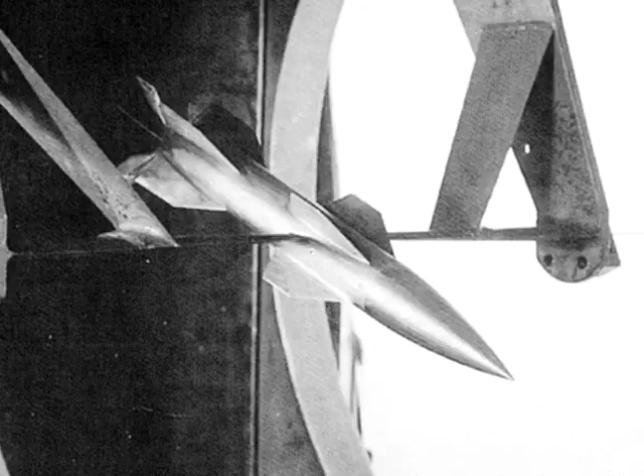On November 28, 1938, legendary aviator Charles Lindbergh sat down to write a letter to his colleague Joseph Ames. Lindbergh had been visiting Germany regularly for several years during a period of aeronautical achievements such as the Hindenburg airship, the first supersonic wind tunnel, and the construction of the first turbojet engine. He had become increasingly concerned that German military aircraft were flying higher and faster than their U.S. military counterparts. One reason was the coordination of their national research efforts.

Lindbergh wrote, "It is more necessary than ever before to give full scope to research if we are to regain the leadership we have lost in some of the fields of military aviation." Written just weeks after the terrifying Kristallnacht attacks in Germany shook the U.S. from its complacency, Lindbergh's letters became a key factor in the decision to create a state-of-the-art aircraft engine research laboratory in Cleveland, Ohio.

The National Advisory Committee for Aeronautics, or NACA, was founded by Congress in 1915 to help the U.S. compete with Europe in the area of aeronautical technology during World War I. The NACA was a precursor of the National Aeronautics and Space Administration, or NASA, of today. As the threat of World War II loomed, the NACA expanded its research and opened 2 new laboratories. The one dedicated to the study of engines was located in Cleveland, Ohio.

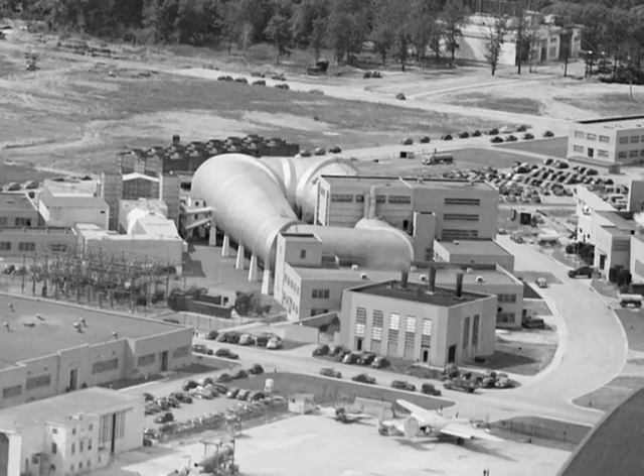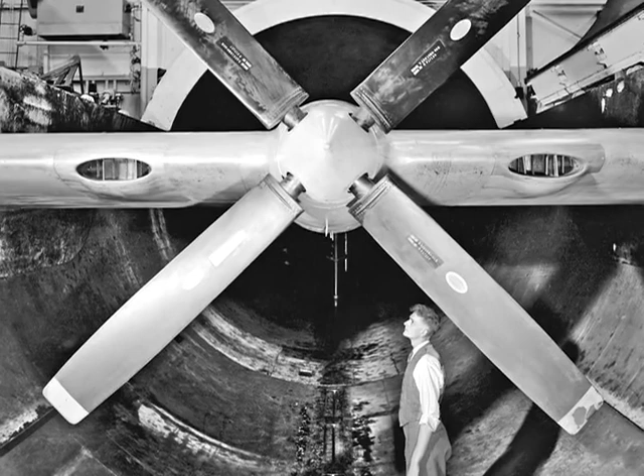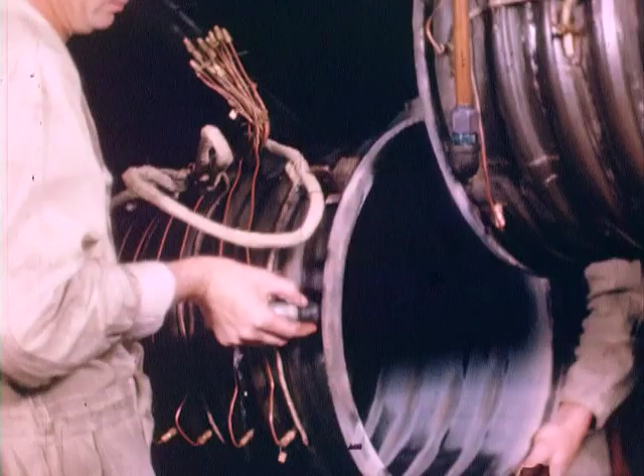This Aircraft Engine Research Laboratory, or AERL, included the nation's first wind tunnel for studying actual aircraft engines in the same conditions they would experience during flight. The Altitude Wind Tunnel, or AWT, allowed researchers to systematically study aircraft engine behavior and perfect new innovations in aeronautics. Designed by some of the best and brightest minds of the day, the AWT proved itself to be a crucial and versatile testing facility, from supporting the development of the jet engine during the 1940s and 50s to its rebirth in the 1960s for Project Mercury and Centaur rocket testing.

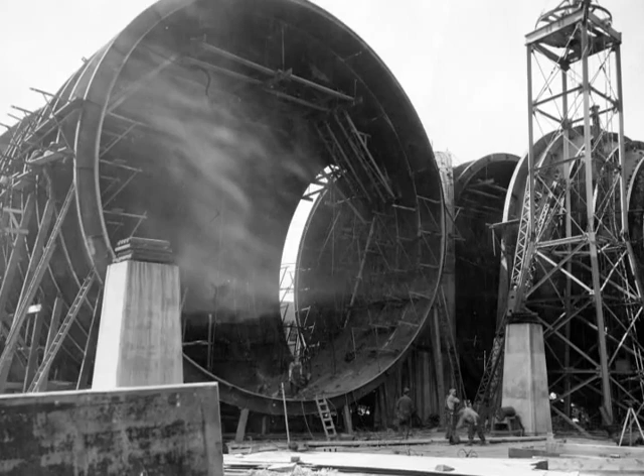The AWT was a huge project. As you can see, it's a massive, massive structure. And there was no technology that would tell you how to build something like this. It was all new. The Altitude Wind Tunnel was likely the most advanced wind tunnel of its time. Designed by engineers at NACA's Langley and Ames laboratories, the AWT included a number of ingenious features needed to test full-scale aircraft engines and the airspeed, altitude, and air quality experienced during flight.

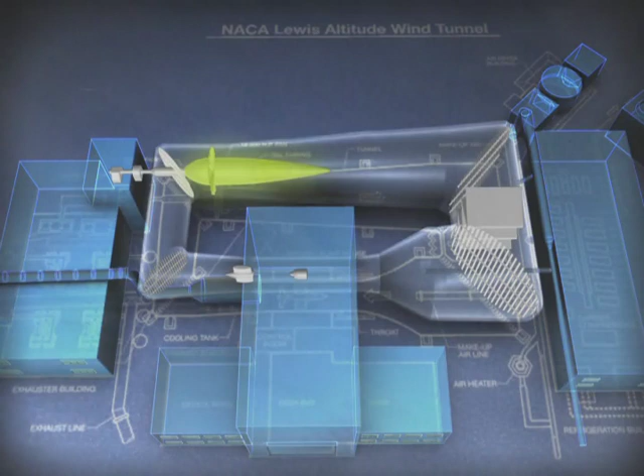This facility had to get temperatures that were very, very cold, and the air had to be almost a vacuum. And this was very difficult to do in a structure this size. And the amazing thing is it all worked perfectly. The wind stream of the AWT was created by a massive 31-foot propeller, resulting in air speeds that could reach 500 miles per hour. As the wind stream raced down the tunnel, turning vanes directed it around the corners and straightened the flow. A powerful refrigeration system reduced the temperature to minus 47 degrees. Large exhausters in the exhauster building removed air from inside the tunnel to simulate the thin atmosphere found at high altitudes.

Just prior to reaching the test section, the diameter of the tunnel decreased in order to further increase the speed of the Arctic wind stream as it rushed into the 20-foot diameter test section. The roaring engine in the test section was operated remotely from the soundproof control room, as myriad instrumentation recorded tunnel conditions and engine performance. Engine contaminants were exhausted from the tunnel through a large air scoop located just beyond the test section. Fresh air was introduced into the wind stream prior to the test section to make up for this exhausted air.

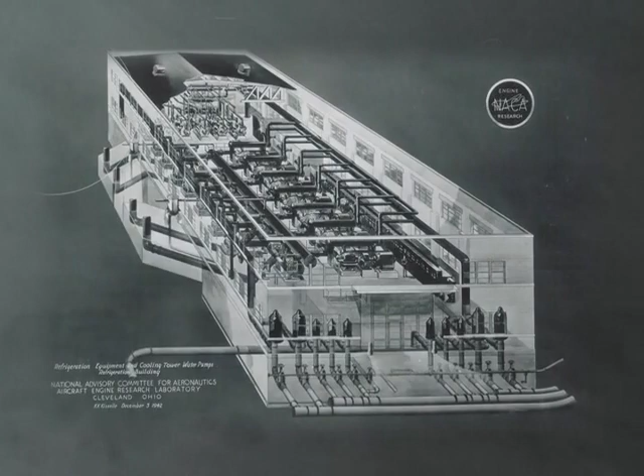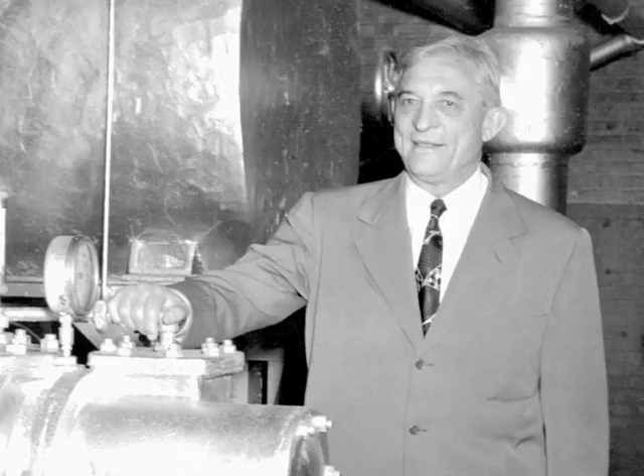One of the most daunting engineering tasks in the design of the AWT was the creation of a system to reduce the air temperature to frigid temperatures encountered in altitude conditions. This powerful system had to cool millions of cubic feet of airflow every minute, an unprecedented requirement that caught the attention of the one man considered to be a world expert on the cooling of air, Willis Carrier. Willis Carrier had pioneered the field of air conditioning and felt his company's heat transfer experts should be designing the AWT system. He informed the NACA that the Langley boys conducting the tests did not know what it was all about, and that too much money, and of more importance, too much time had been wasted already.

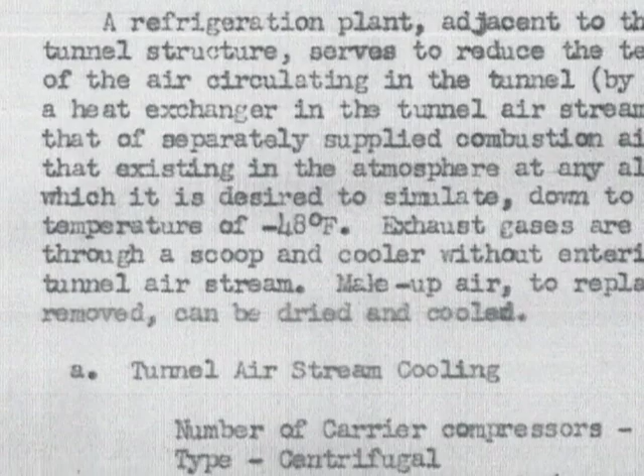Carrier and his engineers went on to devise the AWT cooling system, the largest of its kind in the world. In fact, it was claimed that if the massive cooling system were used for other purposes, it could generate 10,000 tons of ice per day. Willis Carrier would one day refer to the AWT as his greatest achievement.

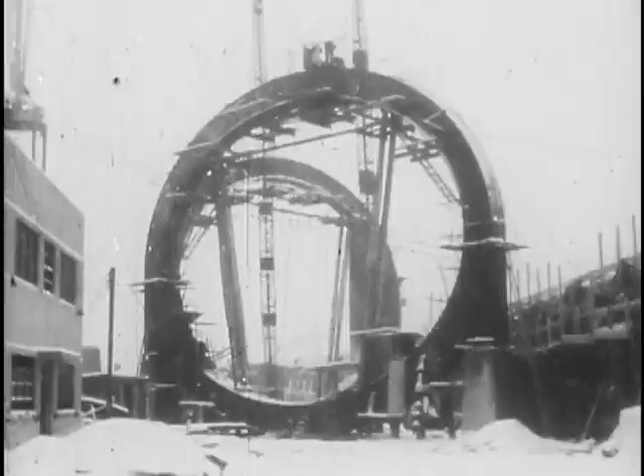Construction of the AWT had begun as the U.S. entered World War II. There was considerable pressure to complete the construction quickly in order to aid the war effort. The new B-29 Superfortress in particular was suffering problems with its engines as it attempted to reach a 30,000-foot cruising altitude. The AWT had been designed to resolve just such an issue.

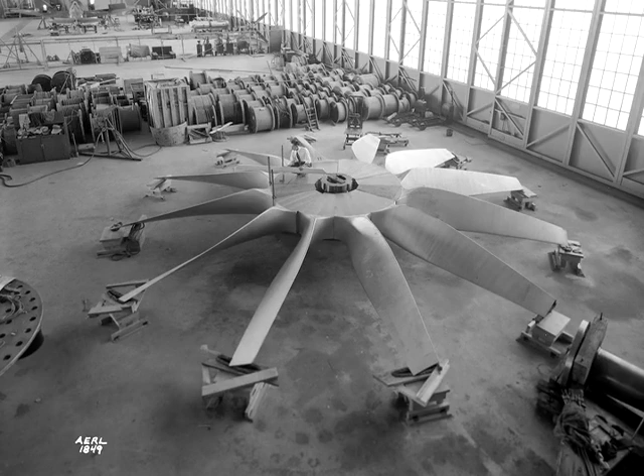On May 17th of 1943, the Memphis Belle became the first heavy bomber in World War II to successfully complete 25 bombing missions. Within 2 months, the Memphis Belle and her crew were back in the U.S. and visiting the AERL as part of a publicity tour. In the hangar behind the bomber, the large fan for the AWT was being assembled. By 1944, construction was completed and the AWT opened its doors for business.

Standing inside a wind tunnel, it is easy to lose one's sense of perspective. Inside, all lines converge toward a single amorphous vanishing point, a virtual light at the end of the tunnel. In order to gain some perspective on the true dimensions of the tunnel, it is helpful to bring a person into view. In much the same way, the research conducted at the AWT and the scope of its changing mission can be best put into perspective by bringing a different individual into frame, Dr. Abe Silverstein.

Dr. Abe Silverstein is best known as one of NASA's founding fathers and is credited with having named the Mercury and Apollo programs. He began his career in 1929 as an NACA researcher at Langley's massive full-scale wind tunnel. In 1943, he was transferred to Cleveland to manage the newly constructed altitude wind tunnel. He immediately set to work, assembling a 90-person team to run the tunnel. Many had been involved in its design and construction. Behind the scenes, Silverstein was involved in something far more secretive.

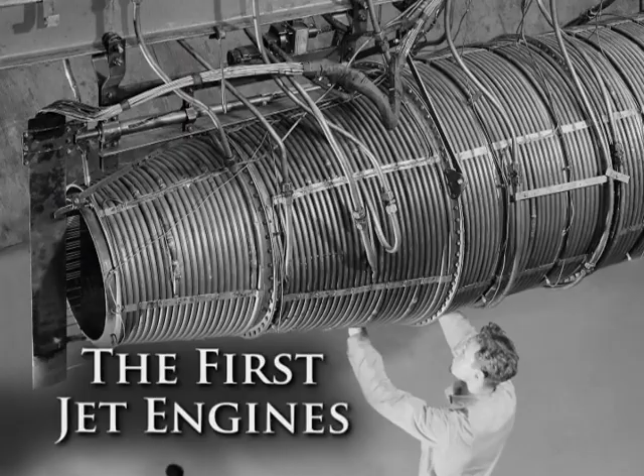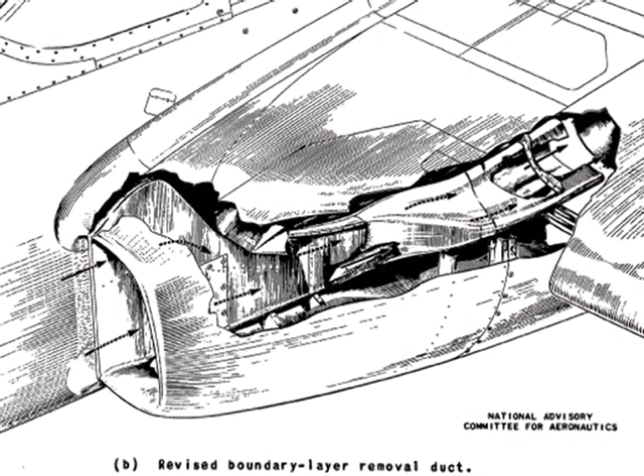The nation's first turbojet engine. The jet engine was developed independently in both Germany and Great Britain during the 1930s. American military leaders had witnessed the first British test flight of the engine in 1941. Plans for the engine were soon secretly transferred to the U.S., where General Electric, or GE, assembled it to create the IA engine, which was almost immediately upgraded and renamed the I-16. The I-16 was incorporated into a Bell YP-59A Airacomet airframe.

In 1943, GE summoned Abe Silverstein to its West Lynn facility to discuss testing the I-16 in altitude conditions. When later asked why he was selected to participate in the secret project, Silverstein replied, "We had the only altitude tunnel. That's the reason I went." Soon afterward, one of the jets was flown to Cleveland for testing in the AWT. Modifications based on the AWT studies allowed better distribution of airflow and reduced drag, improving the aircraft's performance by 25%. However, the Airacomet would not play a role in World War II. The tests would portend an entire new role for the AWT, the development of the turbojet.

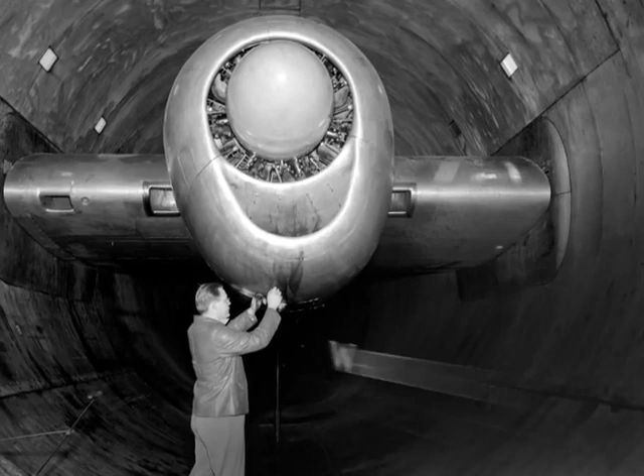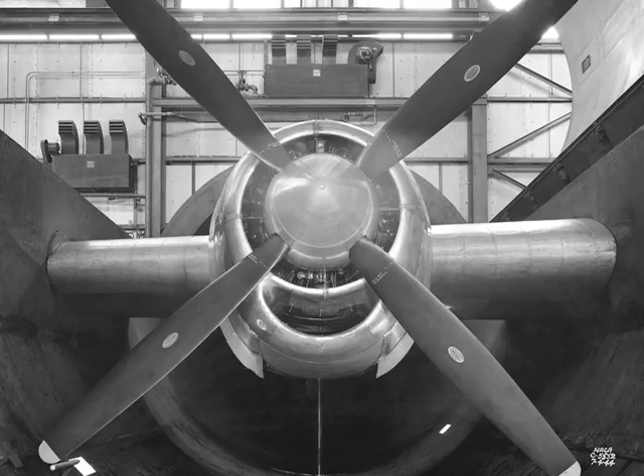In May 1944, an engine from the Boeing B-29 Superfortress was finally installed in the AWT. Researchers determined that its cooling problems stemmed from inconsistent fuel mixtures and poor airflow. By devising the fuel injection system and redirecting the airflow through the engine cylinders, they were able to improve the fuel efficiency by 18%, thus broadening the B-29's flight range and increasing its armament capabilities. The results were too late, however. The B-29's original strategy of high-altitude precision bombing of Japan had been changed to low-altitude firebombing, and the NACA's improvements were not implemented until after the war.

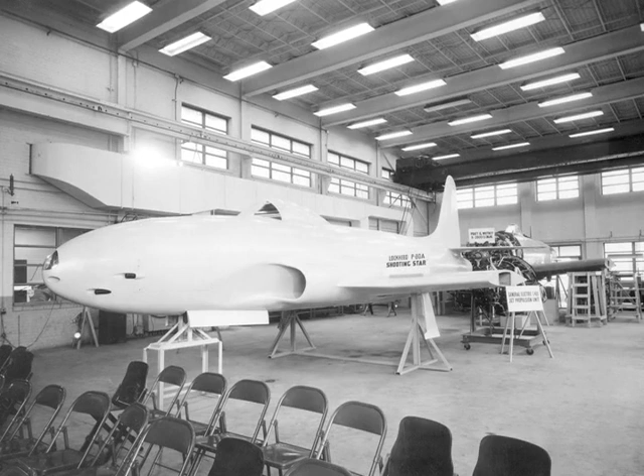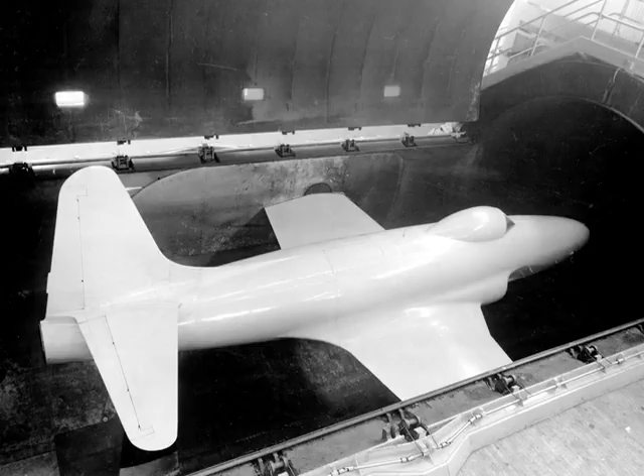The Lockheed YP-80A Shooting Star was the first jet aircraft to be completely manufactured in the U.S., and the first U.S. aircraft to ever fly faster than 500 miles per hour. Studies on the engine at the AWT resulted in the restarting of its GE I-40 engine above 20,000 feet for the first time, and an almost instantaneous 50% increase in thrust through use of a variable area nozzle. The Shooting Star would later go on to a successful reincarnation as the Lockheed F-80 during the Korean War.

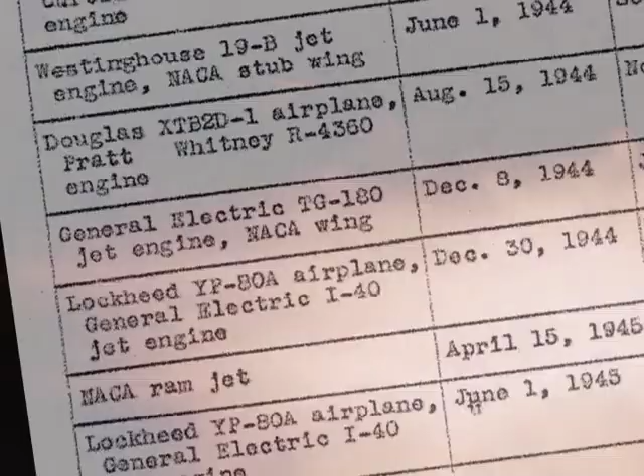In the end, the AWT had little effect on the outcome of the war. Its most applicable contribution, the baffling of the B-29 engines, was not implemented until later. Although U.S. development of the turbojet would not be fast enough to make any significant impact on the outcome of the war, it did have long-term effects. The AWT demonstrated remarkable flexibility and became a significant contributor in developing the nation's first jet engines, both centrifugal and axial flow. The AWT had not only survived the turbojet revolution, it had embraced it.

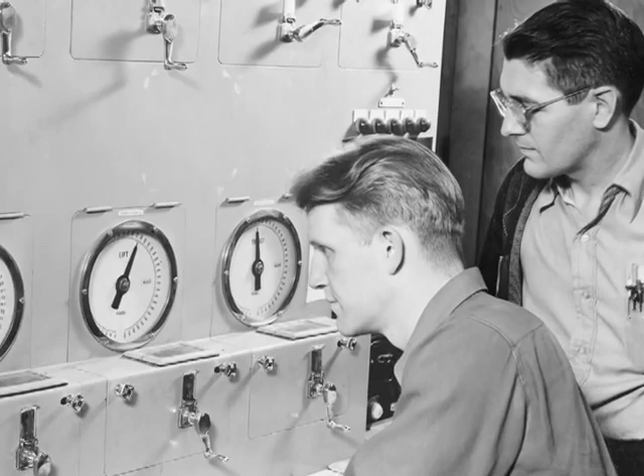During its first 18 months of service, the tunnel was modified to test jet engines. The staff showed that it could handle the new facility. A methodology of analysis was established that would be applied repeatedly over the next decade, and the emerging AERL leadership showed that it could change course with almost no warning.

The end of World War II brought about a reorganization of the entire laboratory. Turbojet research and the new realm of high-speed flight became the top priorities. Abe Silverstein was promoted to Chief of the Wind Tunnels and Flight Division, and in 1949 became Director of Research for the entire laboratory.

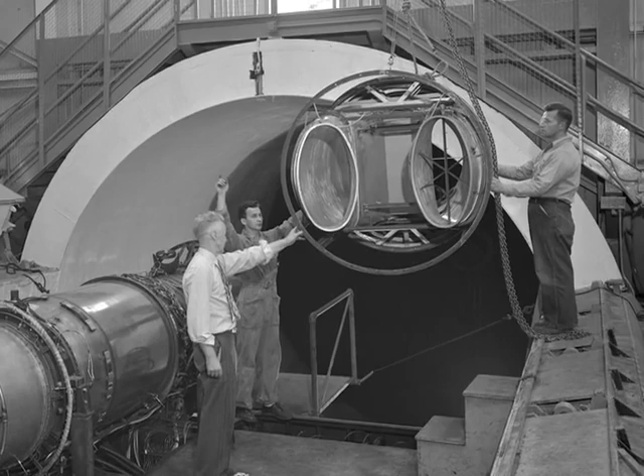One of the most significant problems with the early turbojets was combustion at high altitudes. The AWT was the nation's only facility in which the combustion and performance characteristics of a turbojet could be studied under altitude conditions. Nearly every U.S. jet engine model in the 1940s was tested in the AWT. The engine companies would send their engines here, and they would be just put through their paces. And a great deal of marvelous data was then able to be released to the engine companies.

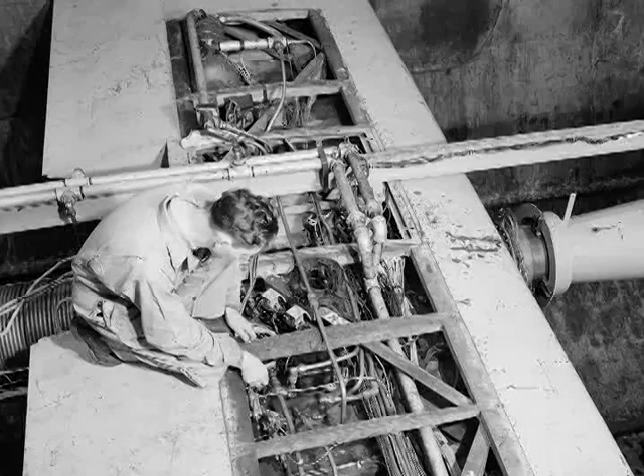Components such as the variable area nozzle and afterburner were run successfully for the first time in the AWT. The afterburner was actually developed at NASA Lewis, and there's a story about Abe Silverstein, who was Director of Research, who peeked in the window and saw the plume of fire coming out of that afterburner, and he was thrilled because it was the first time that it had been tested.

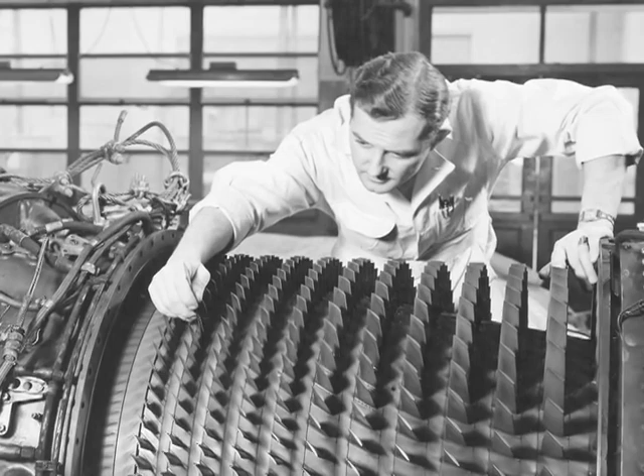As the 1940s drew to a close, the AWT completed its first sprint. The tunnel had been in almost constant operation for 6 years. It had played an important role in the steady development of the jet engine and was used to study ramjets and turboprops. The study and improvement of the axial flow engine from 1945 to 1949 was the AWT's most enduring contribution to the aerospace field.

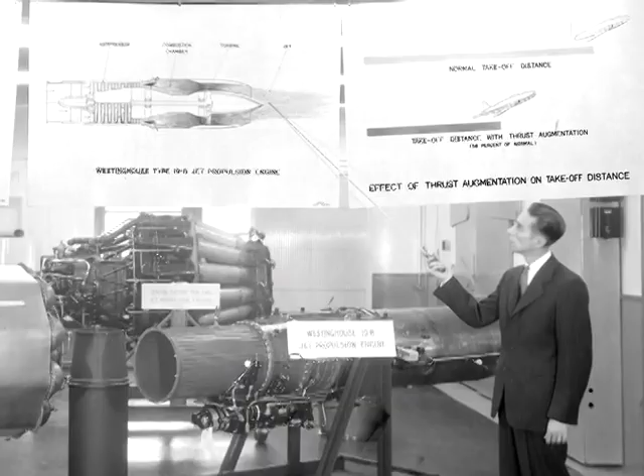The axial flow compressor was really the great contribution that this center made to the development of jet engines. The United States was really a pioneer in the development of the axial compressor. Although they'd been used in Europe, they weren't perfected until Lewis Research Center got their hands on it. The improvements developed in the 1940s would manifest themselves with drastic increases in engine performance and thrust in the early 1950s.

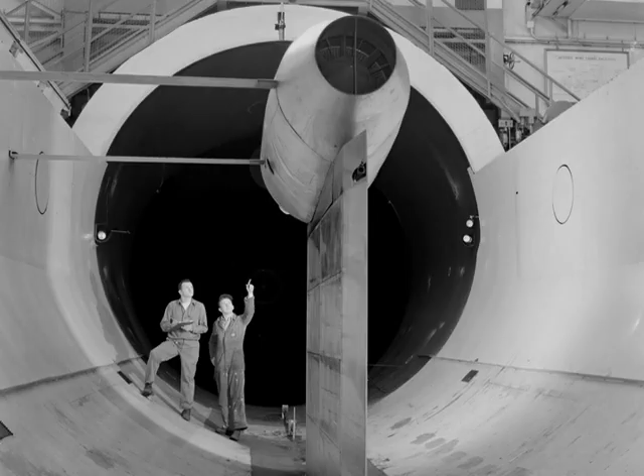In 1952, the AWT underwent an overhaul to increase its testing abilities. A new fan, exhausters, exhaust cooler, and water pump system were added. Afterwards, a series of larger engines were tested in the tunnel. Pratt & Whitney's J57 engine was probably the most successful jet engine of this period. The AWT conducted both general engine studies and a year-long noise suppression investigation on the J57.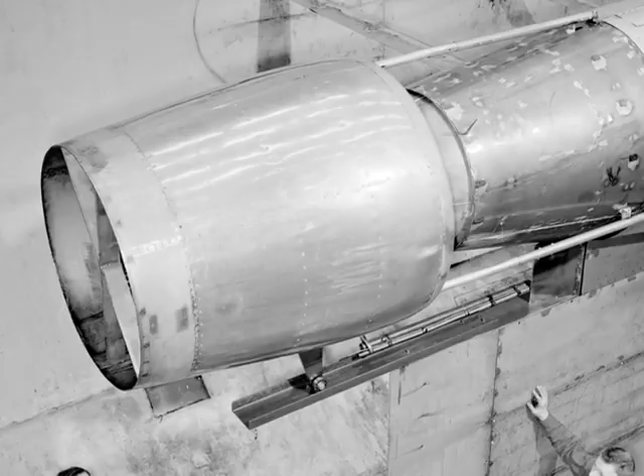By the late 1950s, however, use of the subsonic AWT began declining, and NACA aircraft engine research began plateauing. Some engineers were wondering, where do we go from here? The answer came on October 4th, 1957, with the launch of Sputnik and the laboratory's integration with the new NASA Space Agency 1 year later. Silverstein had been summoned to Washington, D.C. to help create and lead the new agency. The NACA Aircraft Engine Research Facility was renamed NASA Lewis Research Center.

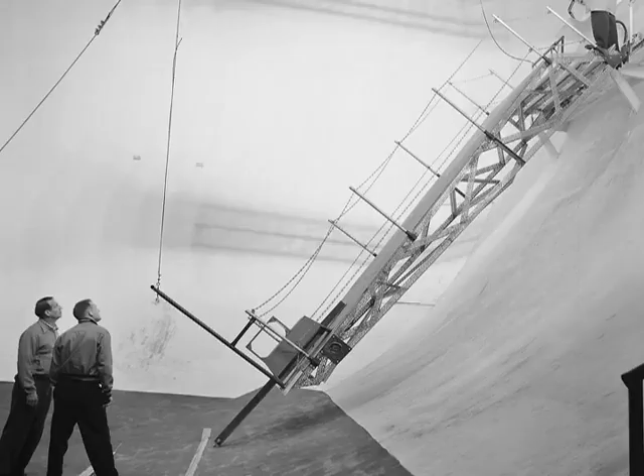The AWT would play a significant role in NASA's first effort, Project Mercury, only not as a wind tunnel. The agency began to recognize that at some point all these aeronautical capabilities had application for advancing the technologies that would be needed to do space travel and space exploration. AWT was one of the prime examples. The refrigeration coils and turning vanes were removed from the western leg of the tunnel so that the Big Joe attitude control and retro rocket system could be tested at simulated altitudes up to 80,000 feet.

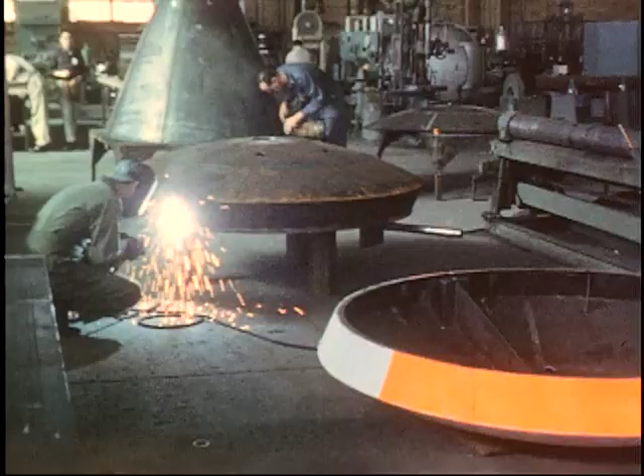Big Joe was a successful single attempt early in Project Mercury to use a full-scale Atlas booster and test the re-entry of a boilerplate Mercury capsule without actually placing it in orbit. Lewis designed the attitude control system and assembled the components. Its guidance system was tested in the AWT.

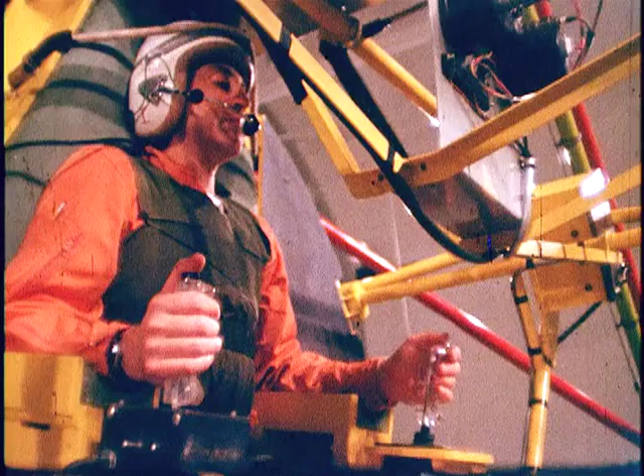Mercury capsule testing in the AWT continued afterwards with the separation system for the Atlas and Redstone boosters, retro rockets calibration, and escape tower rockets. Perhaps the best-known AWT studies, however, were conducted in the gimbal rig. A gimbaling platform had been set up in the AWT for the Big Joe tests. Afterwards, a pilot's chair, control panel, and nitrogen jet control system were added to the rig.

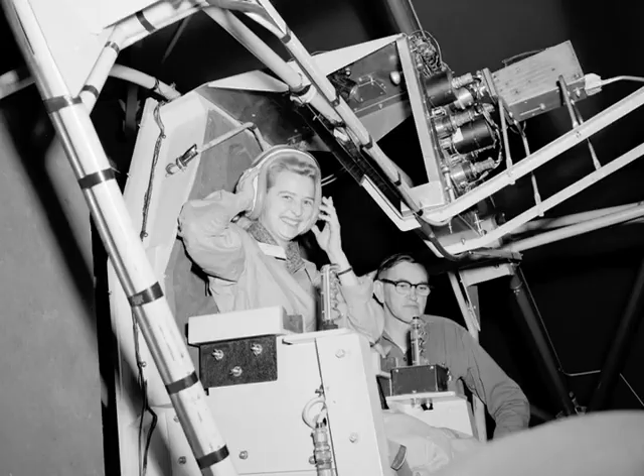The Mercury astronauts would use this multi-axis space test inertia facility, or MASTIF, to practice bringing a tumbling spacecraft under control. A crude dressing room known as the Astro Penthouse was temporarily constructed in the AWT with a cot for astronauts to recuperate on after their rides. In early 1960, the 7 astronauts, a female astronaut trainee, and several pilots traveled to Lewis to train on the MASTIF.

Alan Shepard would be first. On the initial runs, Shepard did well, bringing the machine under control on 1 and 2 axes. Once all 3 axes were in motion, however, Shepard became ill and had to activate the chicken switch that signaled to the engineers to shut down the machine. Over the next few days, however, Shepard continued to climb into the rig until he developed a method to bring the machine to a standstill. John Glenn, Gus Grissom, and the others followed suit.

When the AWT had come online just 15 years before, no one could have foreseen that it would be used as an altitude tank for manned space missions. But once again, it and its staff adapted quickly and contributed to a new role. Out of the test cells, these wonderful mechanics and technicians came and switched their attention from airplane problems to space problems. We found that transition was almost seamless.

The Big Joe capsule verified that the autopilot could keep the heat shield in position during re-entry. The Mercury escape system was never deployed during an actual launch. But the tumbling capsule scenario did manifest itself on Neil Armstrong and Dave Scott's Gemini 8 mission.

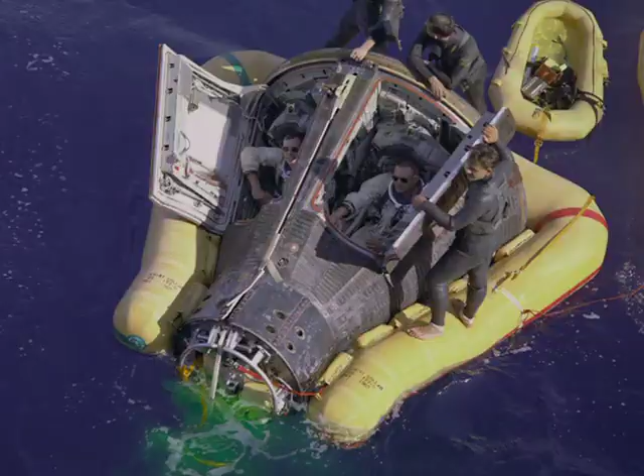Following the decision to attempt to go to the moon, NASA began rapidly expanding its staff and test facilities. The space effort is extremely interesting, and it is an area in which there will be considerable growth for the future. I think the young men in this country who have been properly trained in the sciences and technology are, in many cases, eager to get into the program, and this will afford them the opportunity.

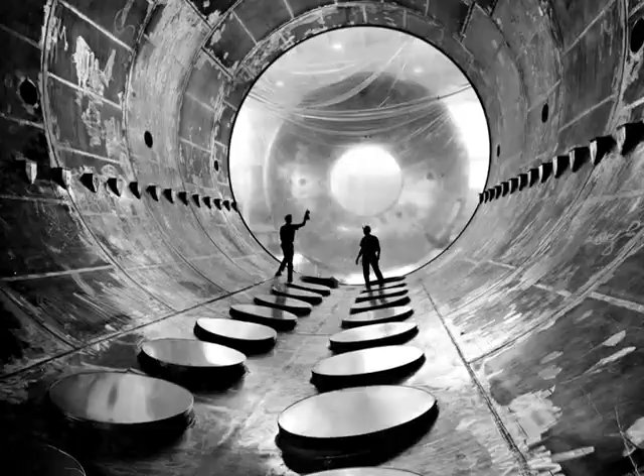Well, the beauty of government facilities is that they can be adapted to a variety of uses, and it's not really the facilities, but the people who are so creative and able to do this, and they were able to find new uses for old structures. One capability considered necessary by Lewis was a large space simulation chamber. Initial space flights revealed that the behavior of engines, operating systems, and flight hardware were affected by the environmental conditions encountered in space.

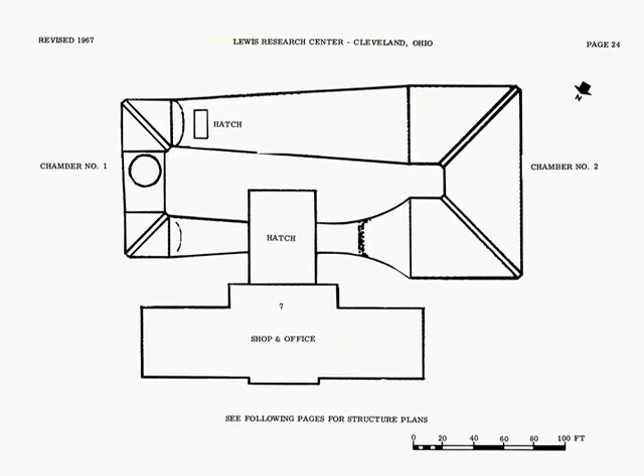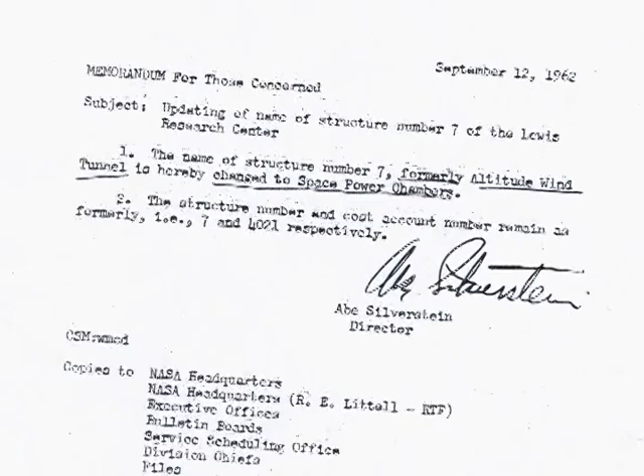It was decided to construct 2 test chambers within the AWT's tunnel shell, one capable of simulating the altitudes of outer space, the other of Earth's upper atmosphere. Bulkheads were placed within the tunnel to seal off the new chambers. The exterior shell of the east end was rewelded and a vacuum pump house was built underneath. After over a year of construction, the facility was officially renamed the Space Power Chambers, or SPC, on September 12, 1962. Its mission, however, would change dramatically just weeks later.

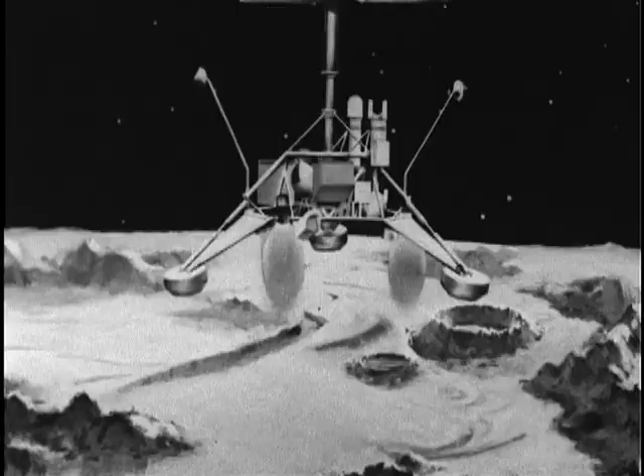Centaur was a powerful second-stage rocket designed by General Dynamics to run on liquid hydrogen and oxygen. It had a sophisticated design that allowed it to carry larger payloads and restart its engines in space. NASA was relying on the new rocket to send a series of the Surveyor spacecraft to the moon to photograph and sample the lunar surface as a precursor to the Apollo landings.

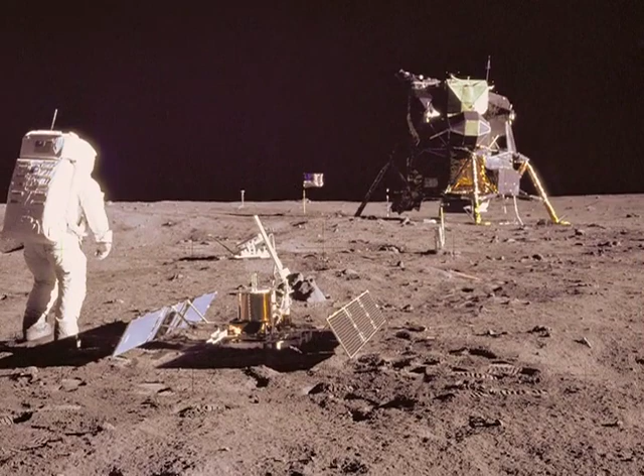We didn't know a lot about the moon, so programs like Lunar Orbiter were designed to find out things that were important to the design of the Apollo lander and, in fact, the entire Apollo system.

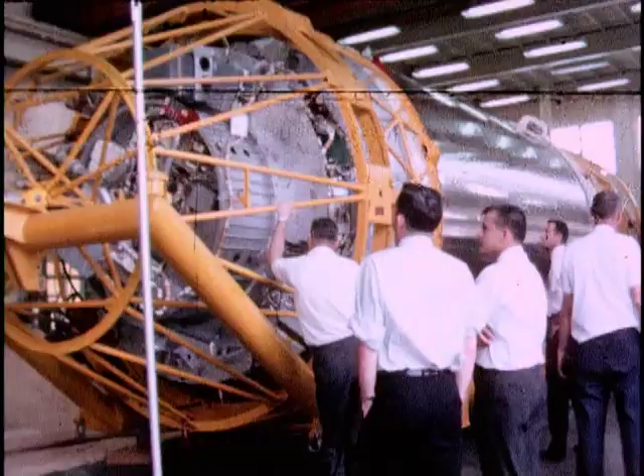After its initial launch exploded 54 seconds into the mission, the program was transferred to Lewis. Silverstein returned to Cleveland as center director in 1961 and personally oversaw the Centaur work. After a year of modifications and testing at Lewis's other facilities, the second Centaur launch was successful.

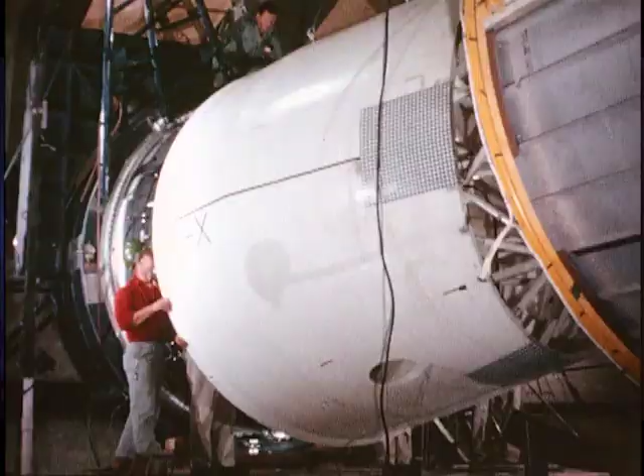It was a very exciting time. We were working on a high priority program, had the highest national priority. It was a precursor to Apollo. Apollo was not going to happen without our perfecting the Centaur, so the Centaur could complete the Surveyor program.

The first study in SPC's high-altitude chamber analyzed the retro rockets, which separated the Centaur from the Atlas booster. A model that recreated the mass properties of a full-size Atlas Centaur was hung horizontally on a trolley system. These tests would result in a new jettison method that significantly reduced the separation time and thus minimized the danger of collision between the 2 stages during separation.

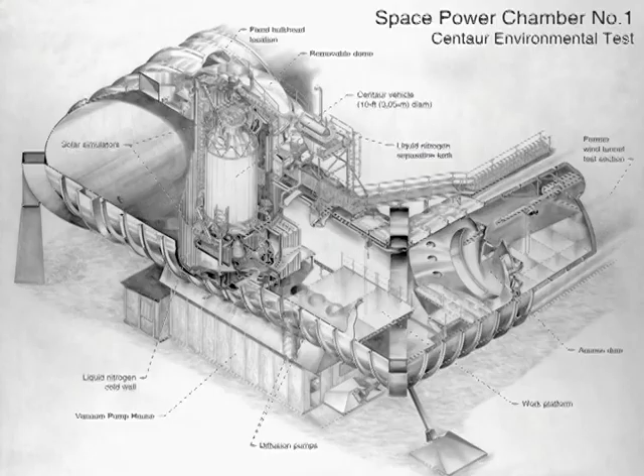A number of modifications were made to the SPC vacuum tank to accommodate a full-scale Centaur, the most prominent of which was the addition of a cylindrical extension with a detachable dome so that the rocket could be positioned vertically. A complex setup was installed inside the chamber to replicate other aspects of outer space.

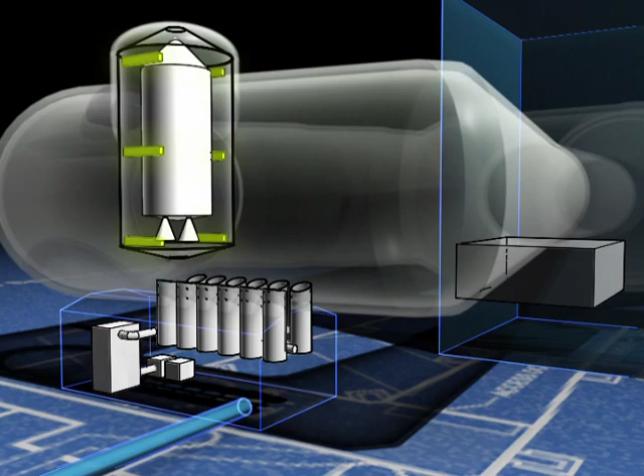A liquid nitrogen-filled cold wall enveloped the Centaur to simulate the cryogenic temperatures of space. Solar radiation was replicated using 6 banks of quartz lamps. Exhausters below the chamber created pressure levels found at an altitude of 100 miles. Electronic malfunctions were the most likely cause of failures in space.

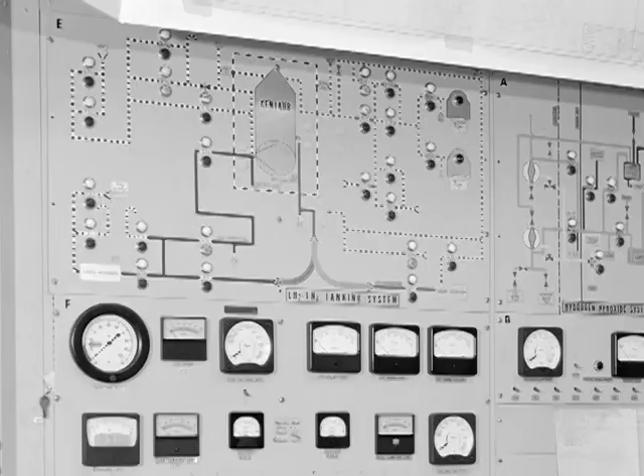Silverstein doctrine said that anything that can be tested meaningfully on the ground before flight will be. That is to say, conditions can be simulated accurately enough that you can do a meaningful test. We had to construct an entire control room that looked very much, if not almost identical, with the control room that we found at the launch complex at Cape Kennedy. That's how you run the systems on the Centaur.

In October 1963, a Centaur rocket was flown to Cleveland for the tests. And that Centaur was brought from the Cape here to Cleveland. I was here the day it arrived, I'll never forget it, and it was set into the chamber in a vertical state on a stand. Long soaks inside SPC's vacuum tank would help the Lewis team determine the effects of the space environment on Centaur's electronics.

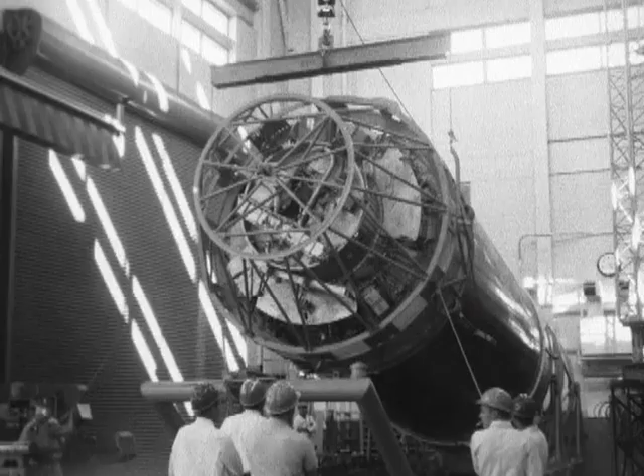For several months, General Dynamics personnel worked with Lewis researchers as they studied and began reassembling the rocket in the shop area. Well, our engineers and mechanics and technicians who had never before been exposed to a machine like the Centaur had to become educated about what it is and how you handle it, especially this fragile, thin-walled structure that you had to be very careful handling because it could not sustain its own weight.

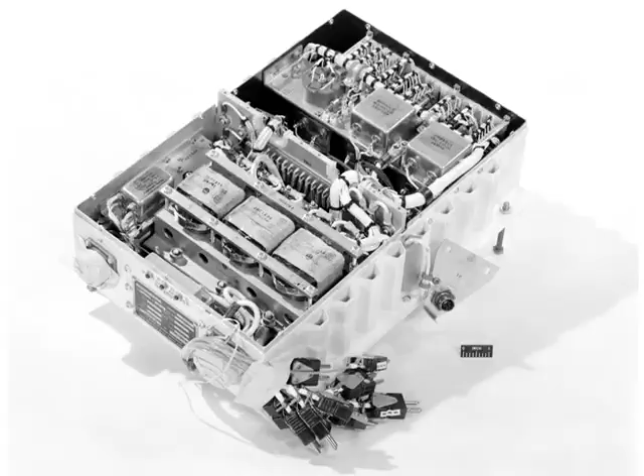The effect of heat, both on the electronics and emanating from the electronics, was one of the primary concerns going into the Centaur tests. The liquid hydrogen propellant had an extremely low boiling point, so any additional heat could cause problems. We had to have step-by-step procedures that were carefully controlled, changes were controlled.

We were all on headsets, would sit at our consoles and operate our systems. I had the range safety control, C-band telemetry systems under my responsibility. And we ran through our procedures under the control of a test conductor, and it would take the better part of a day to get through a number of runs.

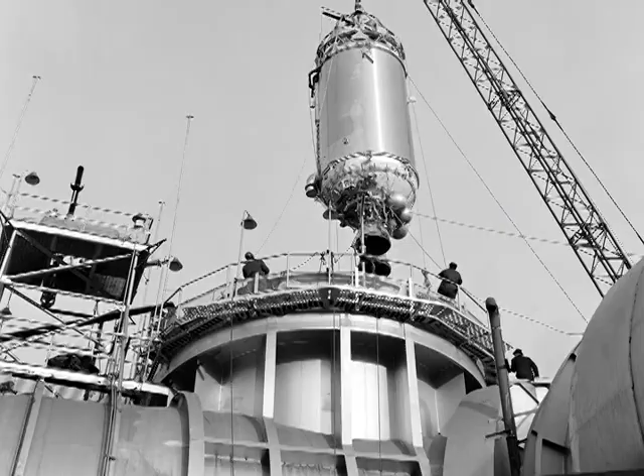The SPC tests, which replicated the entire mission except the firing of the engines, determined that the electronics did not transfer heat to the spacecraft or propellant tanks. So that testing was done here, and it was a major step forward in increasing the reliability of the Atlas Centaur.

The June 30th, 1964 launch of Atlas Centaur III was successful, but the rocket's guidance computer had been interrupted briefly during the ejection of the nose fairing. This mishap could result in a future launch failure. Nose fairings provided an aerodynamic shield for the payload, guidance system, and electronics package as the rocket travels through the Earth's atmosphere. Upon entering space, the two pieces are ejected away from the space vehicle.

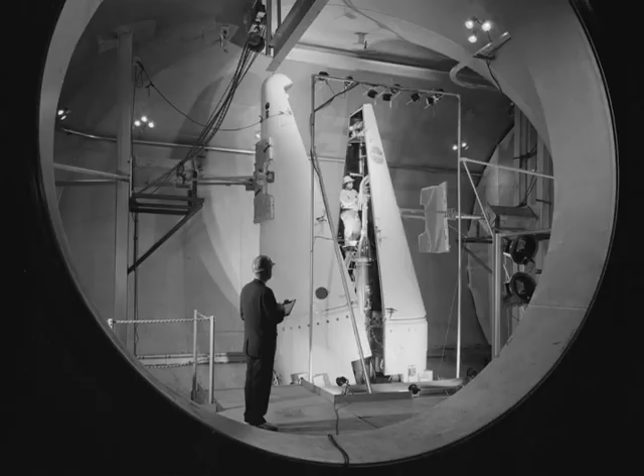The trick is to get those shrouds, after the appropriate period of time in flight, separated safely so that they don't damage the rocket, they don't damage the spacecraft, but they do come off. Within a month of the AC-3 incident, the jettison system was modified and the shroud requalified in the SPC. The next launch was the first Centaur mission to have a completely error-free shroud jettison. The following launch attempt, Atlas Centaur V, never escaped the pad, however.

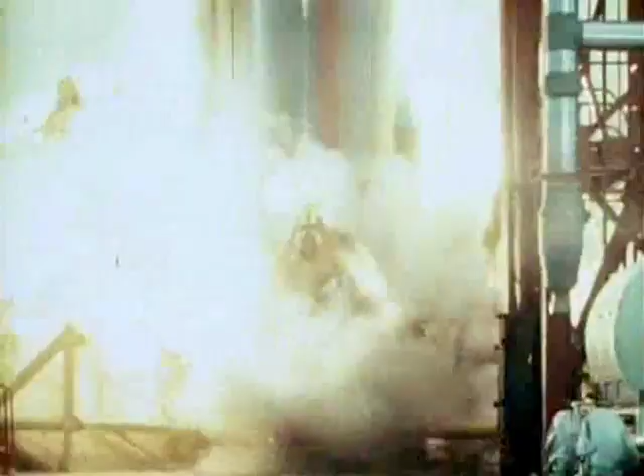An ensuing redesign required a retesting of the shroud and SPC. We did many tests of Centaur shrouds on both ends, beginning with the Surveyor, the first payload carried by Centaur, and later into larger shrouds that involved orbiting astronomical observatories. It was done on the other end of this chamber.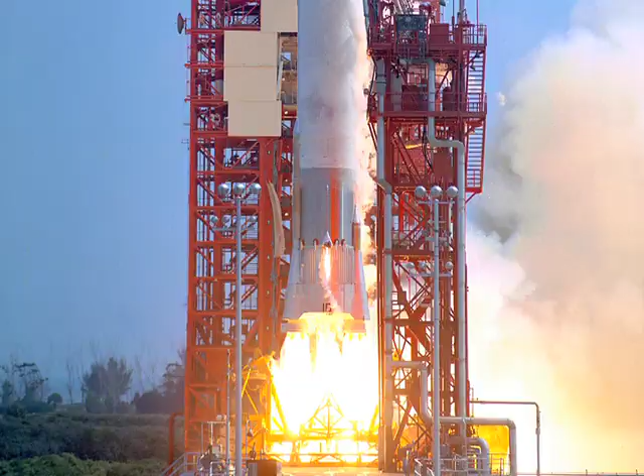Atlas Centaur VI, launched from Cape Canaveral on August 11, 1965, successfully placed a Surveyor model into an elliptical Earth orbit. The mission restored the nation's confidence in the Centaur's capabilities. Finally, on May 30, 1966, the Atlas Centaur X vehicle lifted off from Cape Canaveral carrying the Surveyor 1 spacecraft. The Centaur stage performed perfectly, and Surveyor was on its way.

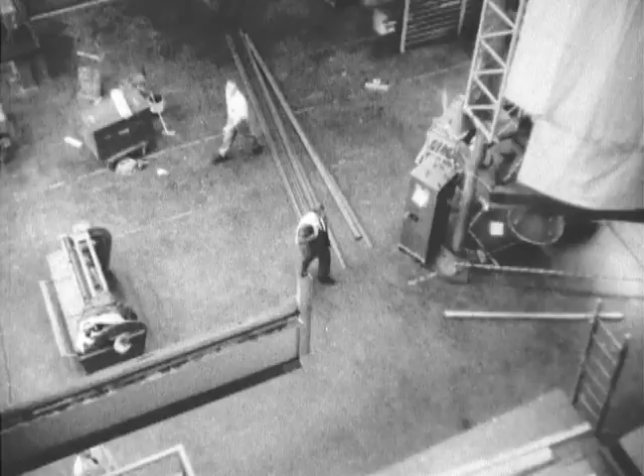3 days later, the Surveyor began sending back images from the surface of the moon. The problematic Centaur had been turned into a tremendous success, thanks in part to the testing at the SPC. 4 years of intense work at the center had paid off.

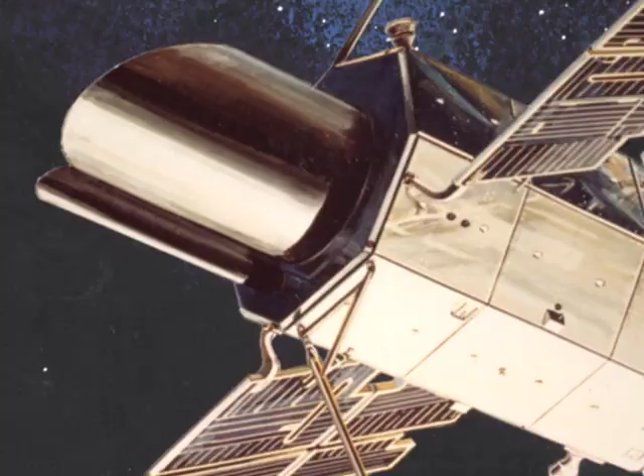A series of satellites carrying large telescopes in the late 1960s and early 1970s were designed to view distant stars and galaxies. The high-altitude SPC chamber was used to test the shroud separation systems for most of these missions. The second of these, launched in 1968, was the largest payload ever carried by a Centaur. After only a month, the satellite obtained over 20 times more ultraviolet data from stars than all of the sounding rocket studies of the previous 15 years combined.

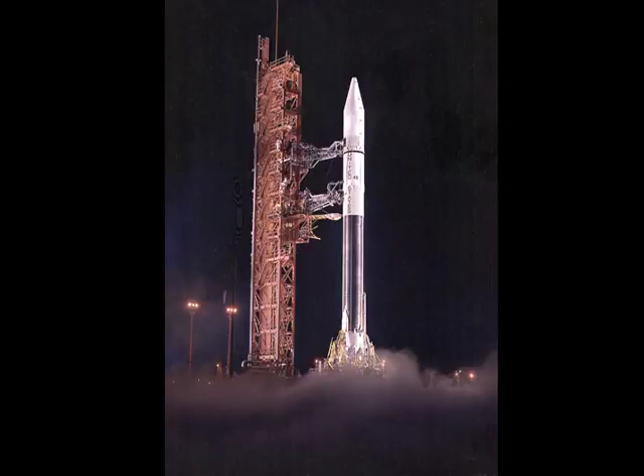The next mission, however, failed when one of the bolts securing the shroud did not release. The SPC was used for the failure investigation and testing of the new single-motion design. SPC continued these large shroud jettison tests for additional missions until 1975.

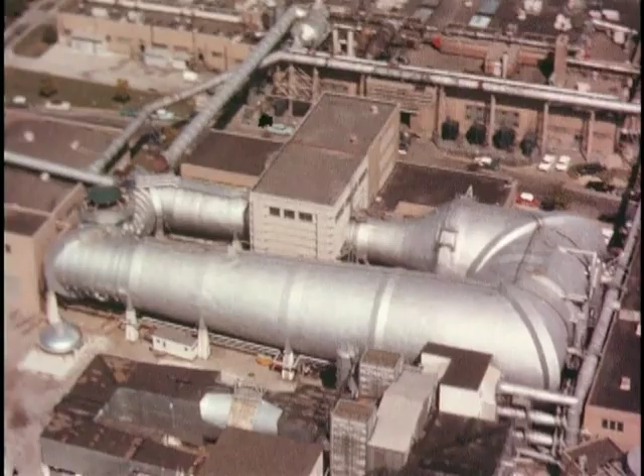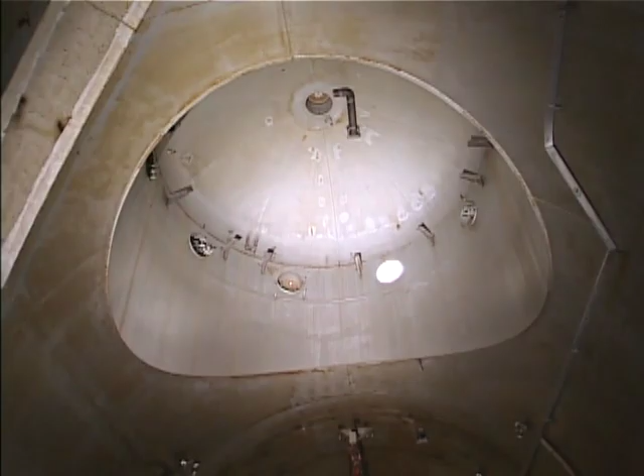The SPC had proven its value during the extensive Centaur testing of the 1960s. However, newer, more powerful facilities began to supersede its abilities. By the mid-1970s, the space power chamber was shut down. Usable equipment was removed. Doors were shut. The electrical connections severed. And the light at the end of the tunnel went dark.

Over the coming years, the shop area was repurposed for work on electric vehicles and eventually became a successful antenna testing facility. In 1985, an extensive effort was made to study a proposal to restore the AWT wind tunnel for vertical and/or short takeoff and landing, or VSTOL, high-speed turboprop, and rotorcraft testing. When Congress canceled the proposed restoration, the tunnel slipped into a deep hibernation.

Though the steel behemoth would continue to stand, the rust was slowly beginning to show. The stories of the altitude wind tunnel and space power chambers were fading, along with the men and women who had once brought the facilities to thundering life. The once thriving facility would remain inky black and dead quiet for 25 years.

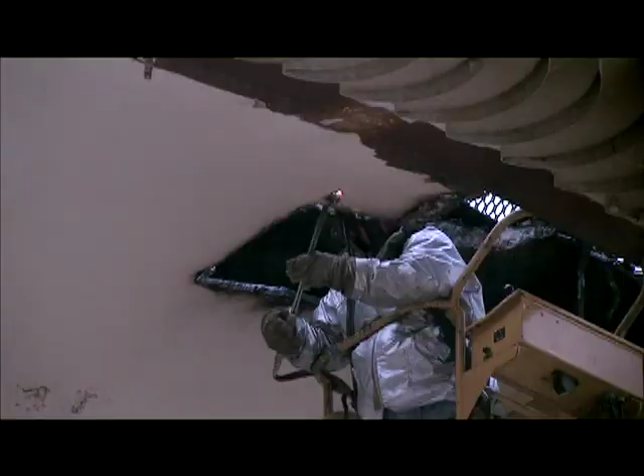In December of 2008, there was a clamoring on the outside tunnel wall. After a few minutes, molten steel began to drip to the tunnel floor. The tunnel had been built to resist the forces of high-speed winds and a crushing vacuum environment. However, it was no match for the blazing hot knife of a cutting torch. The AWT and SPC were coming down.

In 2004, NASA headquarters had offered its centers funds to demolish unused structures. The NASA center in Cleveland, which had been renamed the Glenn Research Center, decided it was time to remove the AWT and SPC.

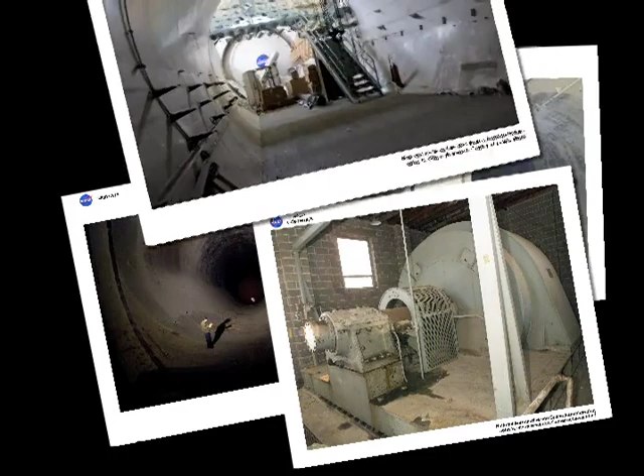NASA Glenn spent 3 years photographing, researching, and documenting the history of the AWT before its demolition. The AWT-SPC facility was one of the most successful test facilities for both the NACA and NASA. And yet, the true strength of the AWT-SPC facility cannot be measured in terms of steel and wind speed. For the building itself would be of minimal benefit, were it not for the excellence of its staff and far-sighted leadership, as exemplified by Dr. Abe Silverstein.

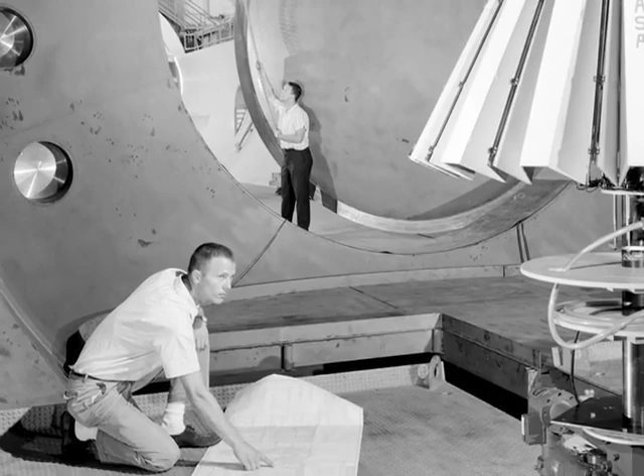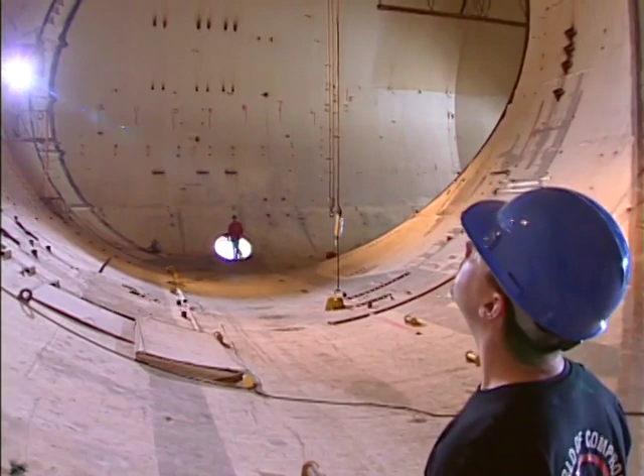The tunnel is now gone. The echoes of its highly skilled staff and the advancements they made live on.